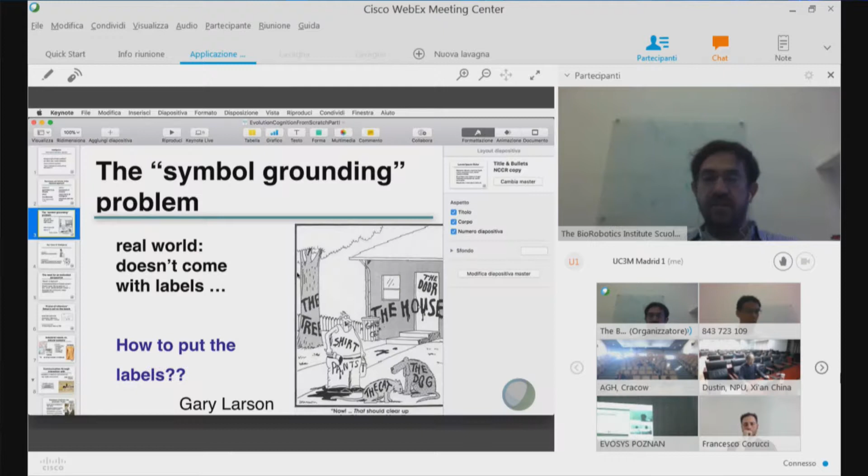So about the classical approach to AI, there are problems; the new one also has problems. I would say that if we accept the idea that this is the way to go, these problems are actually interesting research questions.

So how can we put to work this idea that the interaction with the environment is always mediated by a body? I was also discussing a typical problem of a classical approach, which is the frame of reference approach.

It's the famous example proposed by Herbert Simon about an ant walking on a beach. So the ant walking on a beach - you can imagine this beach in the picture where you have many different obstacles, small rocks, bigger rocks, and the ant seems to walk in a very complex way.

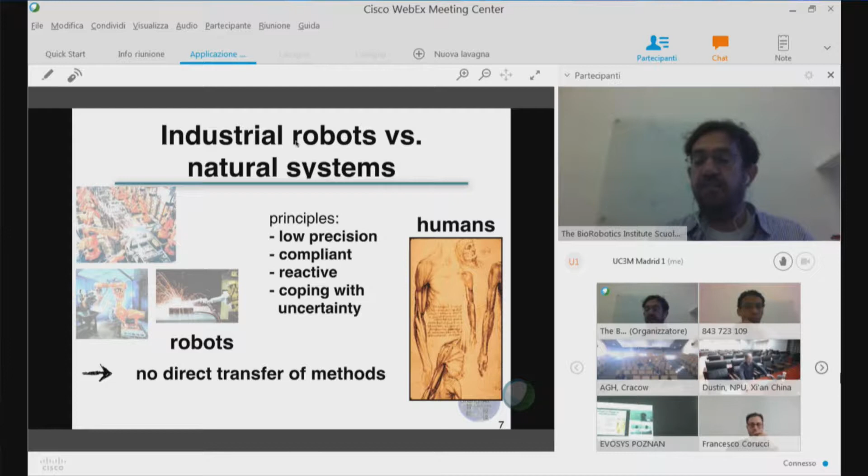So we have this situation. On the one hand, we have robots, which have very accurate, repeatable, precise movement. And on the other side, we have humans, who are low precision, compliant, reactive more than planned, and able to cope with uncertainty.

Simon's ant was actually studied in reality by Holk Cruse, looking at how ants work. And what has been discovered is that actually the walking of an ant comes from the emergent behavior of a very simple control of a single leg. And this behavior is actually mediated by the body.

How to model that? That's an interesting mathematical issue. In the next lecture, both me and the guest lecturer will show you how exotic those models could become.

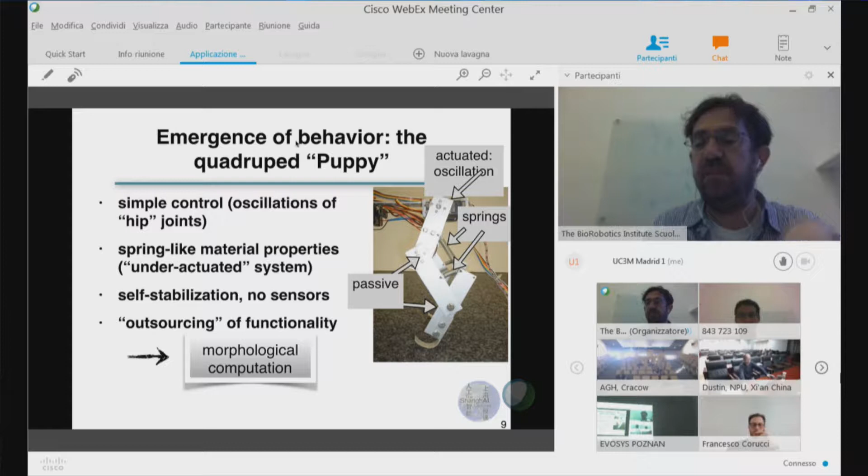This is a famous example by Fumiya Iida of morphological computation. And the nice thing is that this puppy, which was extremely simple, was able to run on a treadmill in a very natural way.

So we have a controller, but then a lot of behaviors are a direct consequence of a musculoskeletal system and of a task and the environment. So think of the ant walking on the beach and also the ant studied by Holk Cruse.

So there have been attempts, I don't have time, but if you are interested, we can go into this offline or in a specific lecture.

Essentially, this puppy is following some attractor in its own dynamics, which are the consequence of the body structure of a puppy. This is extremely interesting because you know where the problem is.

The problem is that if I want to build a demo, I build this puppy, or I build the biped passive walker, and I'm okay. If I want to exploit this principle in a robot doing some purposeful task, I need to develop, not from scratch, but from an early point, a mathematical modeling framework to do that.

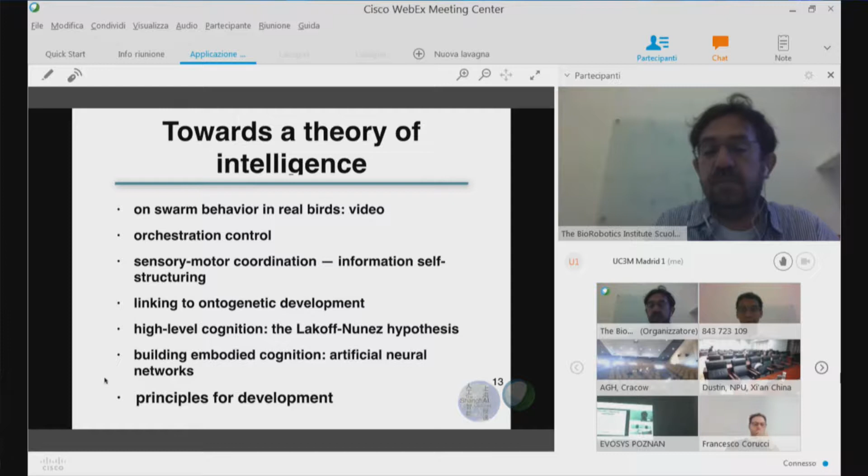Despite the fact that, as told, the principle seems very, very compelling.

Now, I don't know, I will skip this. Oh God. I will try to... I'm doing this experiment. I hope it will work.

I want to show you two things actually. One, but briefly, I'm not going to show you the whole movie.

One is the extreme complexity emerging from simple rules like keep a constant or almost constant distance from your neighbor, which is what we typically see in swarms, and was studied, proposed initially by Reynolds for computer graphics, to be able to simulate this kind of behavior.

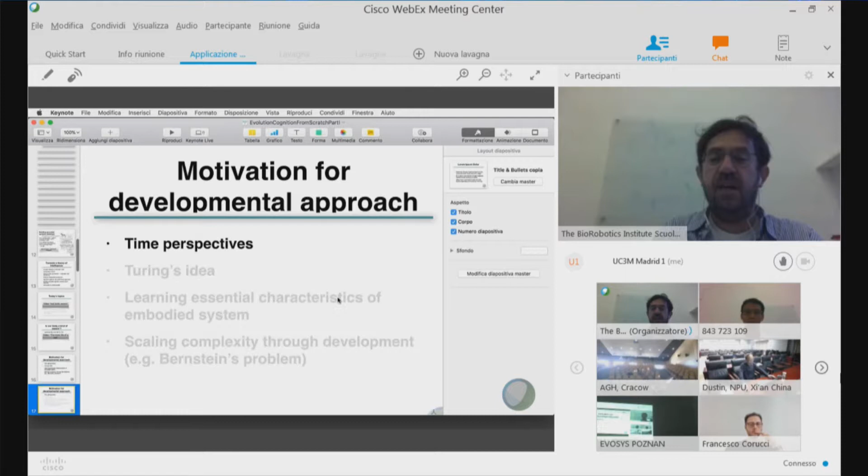Now I want just, since we are slightly late, I want to quote this important aspect that is, now it is less, but in the past it has been more neglected when studying intelligence. Because if we look, you know that at least at the beginning, the idea of AI was to replicate. So still, from time to time, you hear someone talking about human level intelligence, or even super intelligence putting at risk humankind.

Personally, I think we are quite far from those kinds of risks, but from a pure conceptual standpoint, we can see that human-like, real human level intelligence comes from a number of different processes, call them optimization processes or selection processes of behaviors at different levels.

Because we have the phylogenetic level, which is the evolution of a species, where something is set. Then we have the ontogenetic level, which is the development.

So when you think about grasping, for example, next lecture in a few minutes will be about grasping. In humans, this arm is able to perform some relatively sophisticated grasping task, but it took about 2 years to reach that level, when the arm was a small arm similar to this. The brain structure and the symbolic structures developed together.

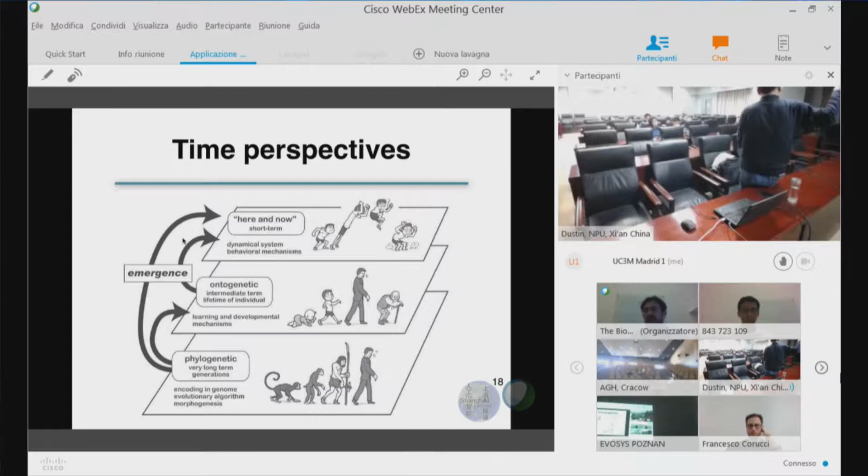So if you remember the last lecture from Josh Bongard, we have reason to think that development is necessary to make evolution quicker, so to speak.

And then we have what we are now probably able to implement, which is just one step of evolution of human level intelligence in humans, but also cat level intelligence in cats, or octopus level intelligence in octopus. So it's the short-term optimization of a behavior, which can be learning.

And what is now very successful, I hope we will have time to come back to this in a later lecture, is basically deep reinforcement learning.

So deep reinforcement learning is a very data hungry approach to what we may call the here and now. So it's the final optimization, and it relies on tagging.

So it's still not, but this is the reason why I'm not so worried by AI taking control of the world. I think AI is still very, very limited in that area.

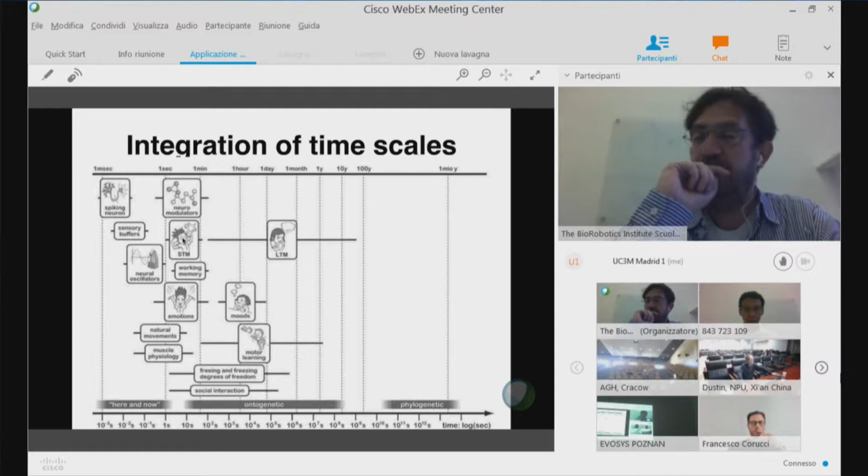Hello, everyone. I'm very glad to have the opportunity to talk to you today. Just to thank Fabio for the invitation. Fabio is here with us this week, and we are very happy to have him here.

So I'm going to talk about enhancing in-hand manipulation via mechanical intelligence. This is one of the main topics of my research group. I am Nicolas, a lecturer in the Dyson School of Design Engineering, Imperial College London, where I lead the REDS lab.

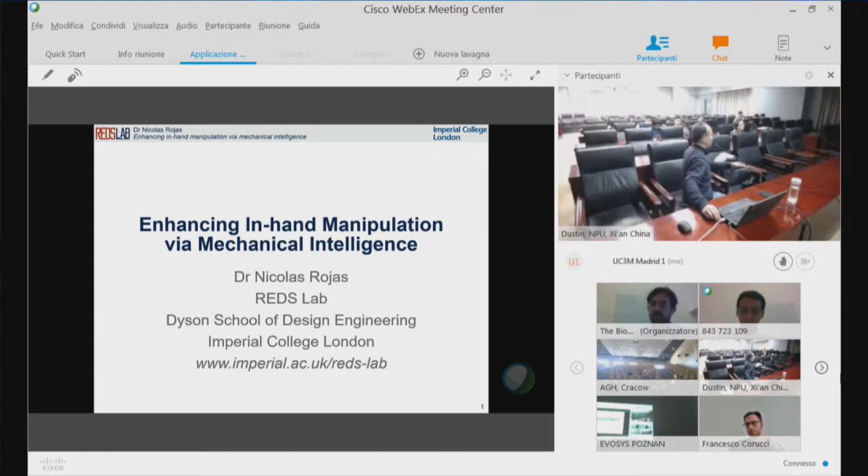Initially, I will talk about general manipulation and how we see manipulation in my research group, so you can have a better perspective of what we are developing. Later I will focus more on the aspects that we have started or explored in the last year, which will drive our research agenda for the coming ones.

Manipulation, for me, is basically the future of robotics. So far, robotics has focused mostly on mobility, and we have progressed a lot in that aspect. The coming revolution is manipulation, and I consider manipulation the technology that sets robotics apart from any other technology. It's a very broad word, and sometimes these broad words are difficult to define, but basically manipulation is the involvement of technology to...

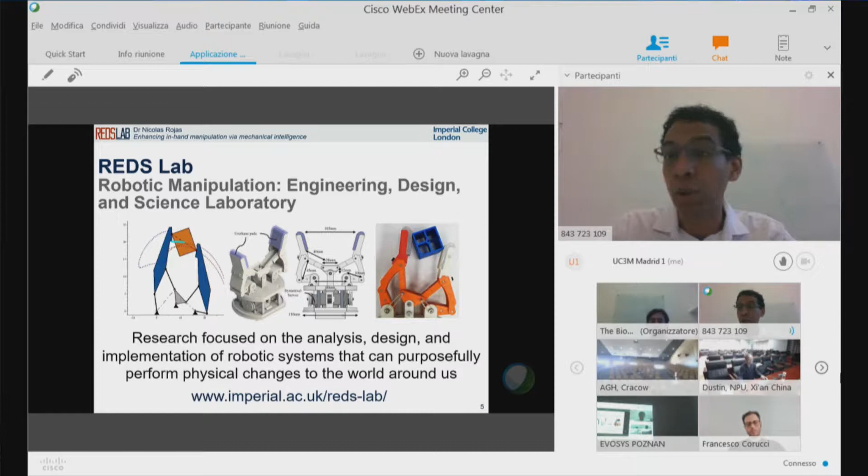In my research group, the REDS lab—Robotic Manipulation Engineering Design and Science Laboratory—we focus on the analysis, design, and implementation of robotic systems that can purposefully perform physical changes to the world around us. We have two broad research interests: robotic gross manipulation and robotic fine manipulation. We focus a lot on conceiving new types of manipulators and end effectors, new concepts and technologies, following both a theoretical and a practical approach.

We are interested in investigating what can be built from the laws of mathematics and nature, to obtain manipulators and end effectors from these mathematical models that can improve the state of the art. But one very important part of our research is the practical aspect—we build robots, we build things from scratch. We need to test things because in manipulation, from my perspective, you can have multiple simulations, but the real world is different, and we have to deal with that. We develop robot hardware that is robust to the uncertainties of not just the environment, but also the uncertainties from the robot itself, the sensors, the actuators, and so on. Our long-term goal is to create robots from scratch that surpass the manipulation capabilities of certain humans and other animals in their diversity and uncertainty.

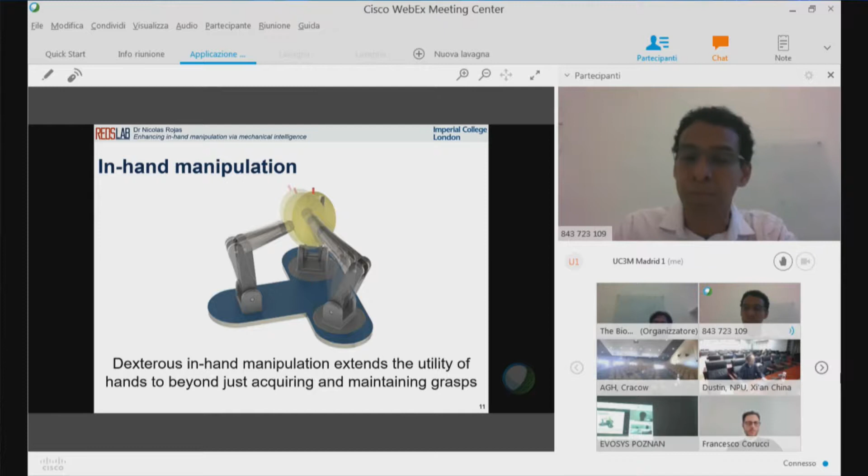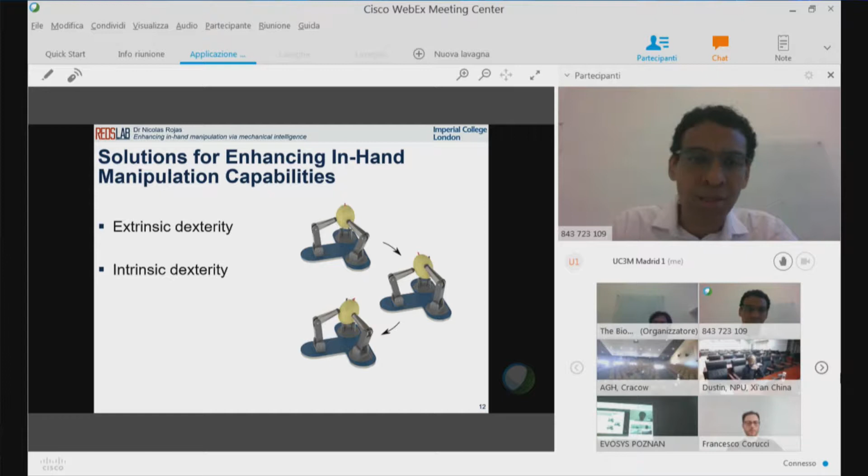The solutions for enhancing in-hand manipulation capabilities can be broadly classified as extrinsic dexterity and intrinsic dexterity. Extrinsic dexterity corresponds to approaches that use resources extrinsic to the hand, for example a table or gravity, in order to improve or facilitate the manipulation you want to perform. Examples include in-hand grasping and cage manipulation, because you use gravity for improving that.

Several researchers have made important advances in this area. One important aspect in extrinsic dexterity, and the approach we want to follow, is to make things reliable in open loop first—things that can control and manipulate the object in open loop. Our hypothesis is that if we develop the best open loop hardware that is very reliable, later when you close the loop with any technology, whether classical control or machine learning approaches, your results should be better.

In extrinsic dexterity, we have seen examples of multiple manipulations, like the flip and pitch-and-flip task of a coin, or the reorientation of cylinders, and so on. Here you see that you are using features external to the hand in order to accomplish these activities.

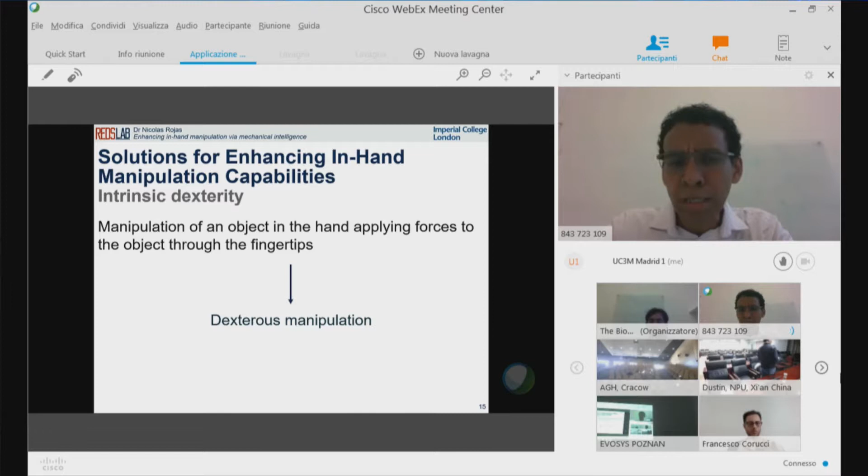In intrinsic dexterity, the manipulation of an object is achieved by applying forces to the object through the fingertips. We grasp the object and rely on the forces we can exert from the fingers in order to change the orientation of the object. This is the typical definition of what we call dexterous manipulation. In this area, there have been three main approaches to enhance the in-hand manipulation capabilities of our hands.

One approach is, of course, the use of high fidelity contact sensors to close the loop and try to manipulate things easier. Another very successful approach has been the use of active or sliding surfaces on the fingertips. And another approach is that you grasp the object, explore the workspace of the object—what is called the dexterous workspace—and then propose planning algorithms.

I want to focus a bit on the second aspect, active and sliding fingertips, because it has been successful. Basically it corresponds to adding some kind of actuator—a slider actuator or a rotator actuator—in your fingertips, and in that way you can control the object.

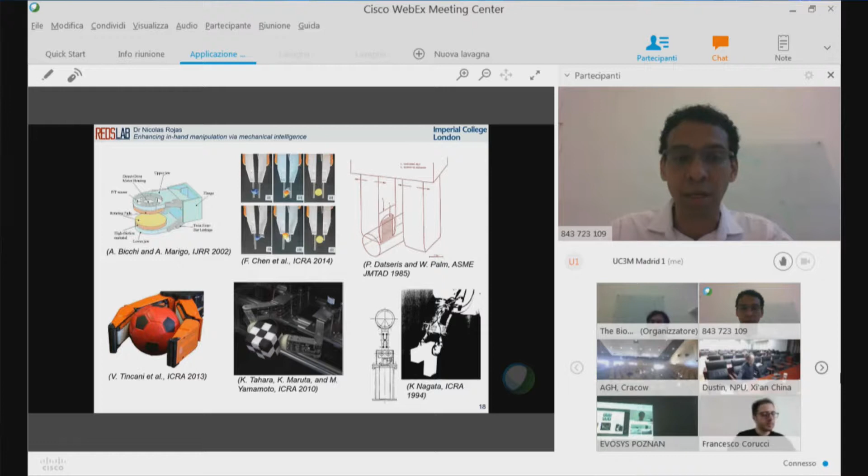Of course the results are good, but we are more interested in understanding better how we can perform these activities directly from the forces of the fingertips. One reason is that one of the problems with active surfaces is that you end up dealing with the problem of controlling the cooperation between these new actuators. So you have the actuators of your hand plus the actuators of the fingertips, and the coordination of these things in order to perform the activity is not necessarily straightforward.

Our approach is a new intrinsic dexterity approach based on the use of flexible and adaptive mechanical components that generate predictable behaviors of the hand-object system. This is our main difference and how we depart from previous approaches. Basically, we see the object and the hand as a whole system, and from there we evaluate how that system can behave and what we can do in order to obtain different motions that could be useful for the object. The three aspects we have focused on for pursuing this approach are contact modeling, manipulation analysis, and design of robot hands.

I'm going to briefly talk about them and what we have done so far. I want to start with contact modeling. The type of contact interactions which can occur between a grasped object and a fingertip are usually classified into 9 categories. The first category is, of course, no contact, so the object has 6 degrees of freedom.

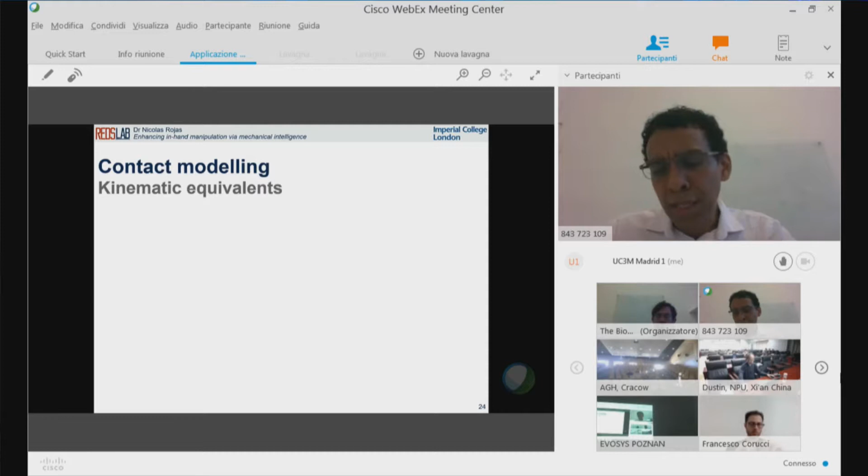So with this, I would like to talk about the kinematic equivalents of these contact models.

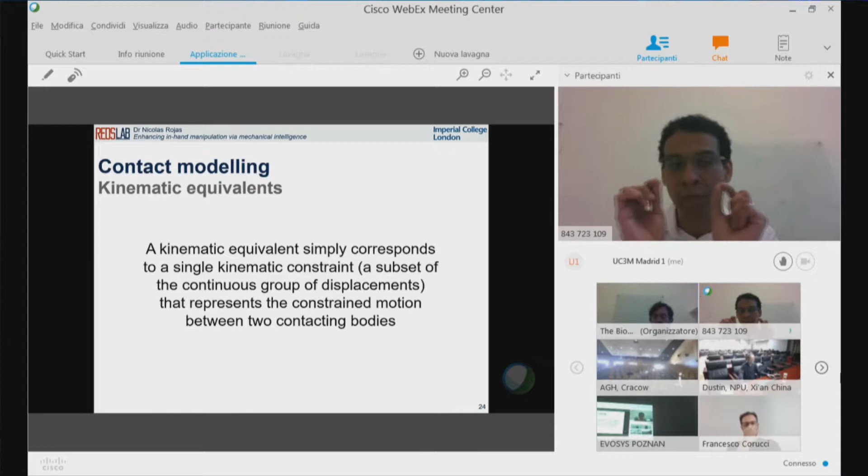A kinematic equivalent is simply a single kinematic constraint that represents the constrained motion between two contacted bodies, between the fingertip and the object. It's a single kinematic constraint that describes this interaction.

We have three standard contact models: point contact without friction, point contact with friction, and soft finger. The kinematic equivalent of point contact without friction is a spherical plus a planar joint. For point contact with friction, it's a spherical joint. And for the soft finger, it's a universal joint. Here we show the different kinematic equivalents of these standard contact models.

A very interesting aspect is that this relation between the contact models and the kinematic equivalents is actually the opposite historically. How robotic manipulation developed the concept of contact models was: let's model the connection between the fingertip and the object as a kinematic pair. That was the origin of the contact models, and from that assumption came the development of the contact models, introduced by Salisbury in his PhD thesis and later complemented by others.

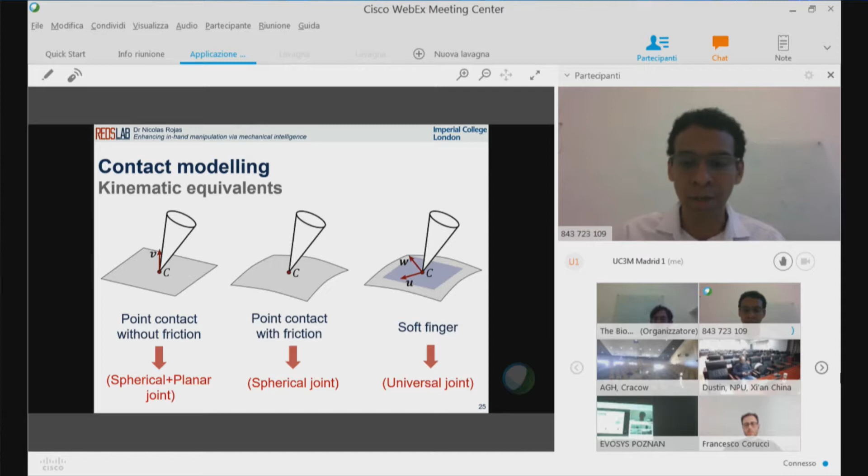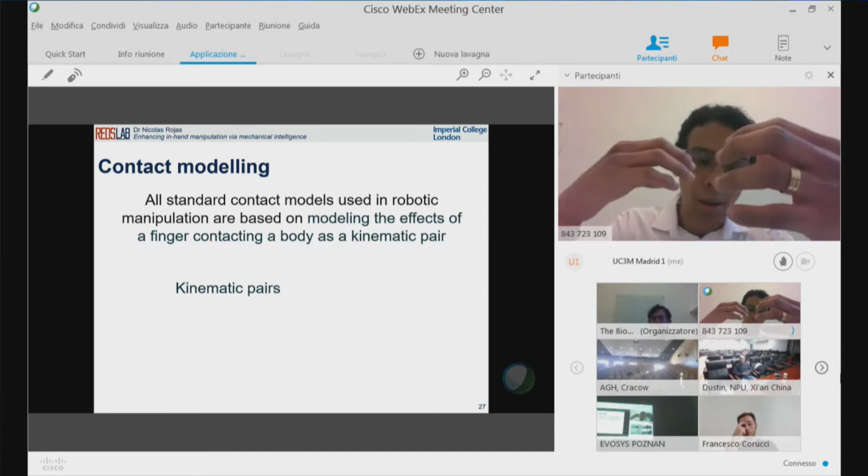So, as I was saying, all standard contact models in robotic manipulation are based on modeling the effect of a fingertip contacting a body as a kinematic pair. When we realized that, we started to think: why not have a more general action for this interaction between the object and the fingertip, allowing a richer definition of contact models?

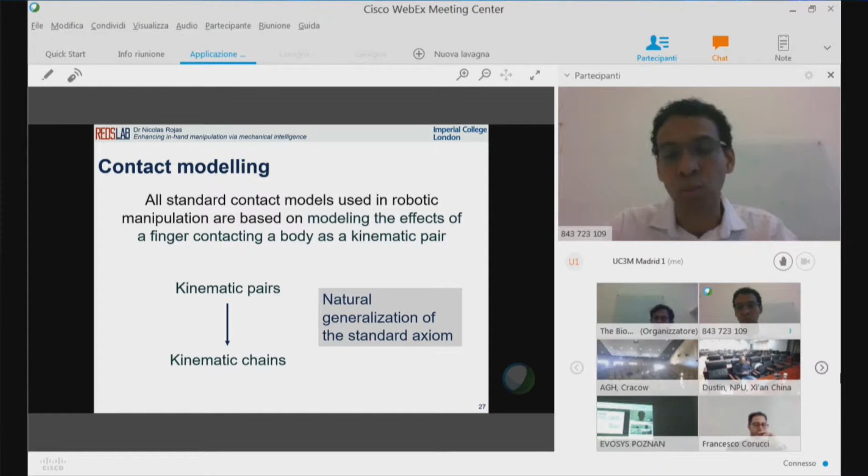So the natural generalization of using kinematic pairs is to use kinematic chains. We started to explore how we can model the interaction between the fingertip and the object using kinematic chains, and we proposed this kinematic chain-based contact model.

We model friction using what we call resistant passive joints, located in the fingertip. Usually passive joints are modeled to move as soon as any torque is exerted on them, but we model friction by saying that in the fingertip, these three joints are resistant passive joints. This means they can resist motion up to some threshold, and when that threshold is passed, the contact breaks because friction is overcome. We chose to call these resistant passive joints instead of friction passive joints, to avoid implying specifics about the geometry or nature of the phenomenon.

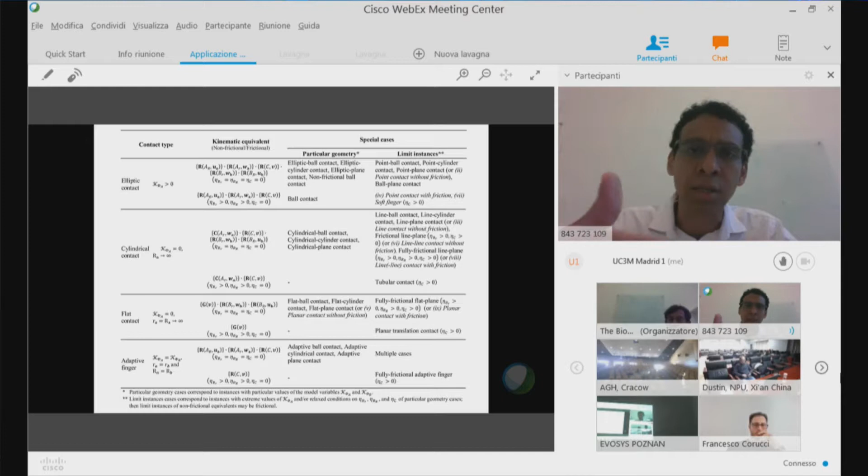Basically, resistant passive joints are those that can resist motion up to some torque. Thanks to this generalization, we have proposed a general classification of contact types, classifying four big contact types, with some special cases. Importantly, all standard categories used in robotic manipulation, the Salisbury taxonomy, including line-line contact with friction introduced later by Hunt in the mid-90s, are obtained as special cases of this generalization.

Moreover, we have proposed new contact models from this generalization that are useful. I won't go into detail here, but we have shown how the wrong assumption of a contact model can lead to wrong results in your analysis. For that reason, it's important to have a larger classification of contact in order to better mimic reality.

So with this, I'm going to talk about manipulation analysis. This has been our first approach, our first goal to enhance manipulation. In manipulation analysis, we have focused on what we call precision manipulation.

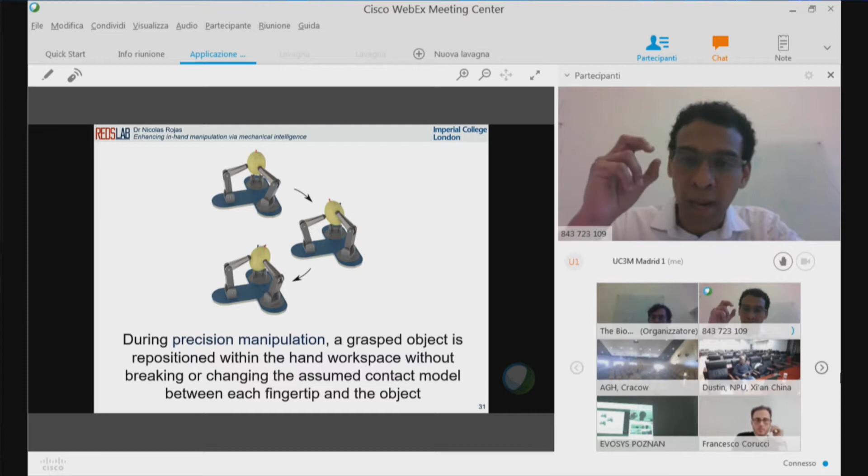We define precision manipulation as when a grasped object is repositioned within the hand workspace without breaking or changing the assumed contact model. This is important because any time you analyze manipulation, you are assuming some kind of contact. In precision manipulation, it happens when we can manipulate the object without breaking or changing the assumed contact. Examples include writing, opening a door with a key, using scissors. There are multiple applications of this kind of manipulation.

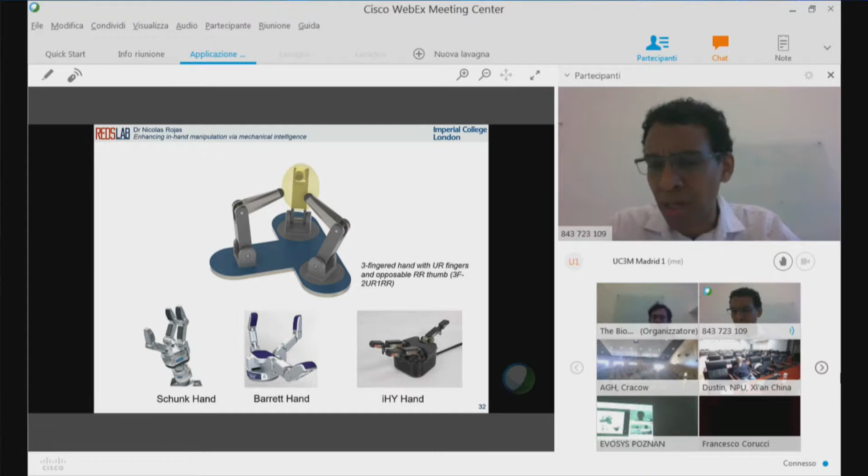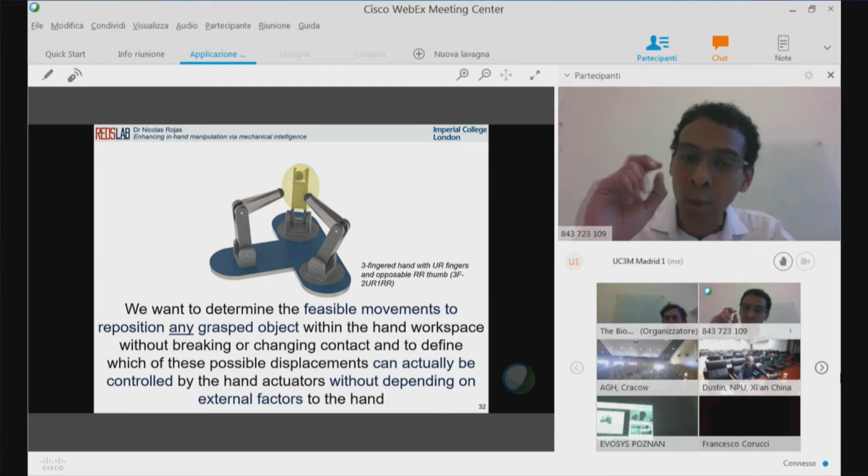Imagine we have this three-finger hand. This is a very popular layout, the same layout we have in several commercial robot hands. Our goal with this analysis is to determine the feasible movements to reposition any grasped object within the hand workspace without breaking or changing contact, of course. Most importantly, we want to define which of these possible displacements can actually be controlled by the hand actuators without depending on external factors to the hand, for example gravity or other things. So we want to understand really what is the motion of the object that we can control with the hand actuators.

We call this precision manipulation analysis, and we have developed this during the last several years. One of the important things of precision manipulation analysis is that in general it's impossible to do with the standard techniques for grasping analysis that we have. It's very difficult, in general not possible. For that reason, we started to explore how we can characterize the motion of the object first, and later how we can determine what actually are the displacements that we can control of this object with the actuators that we have.

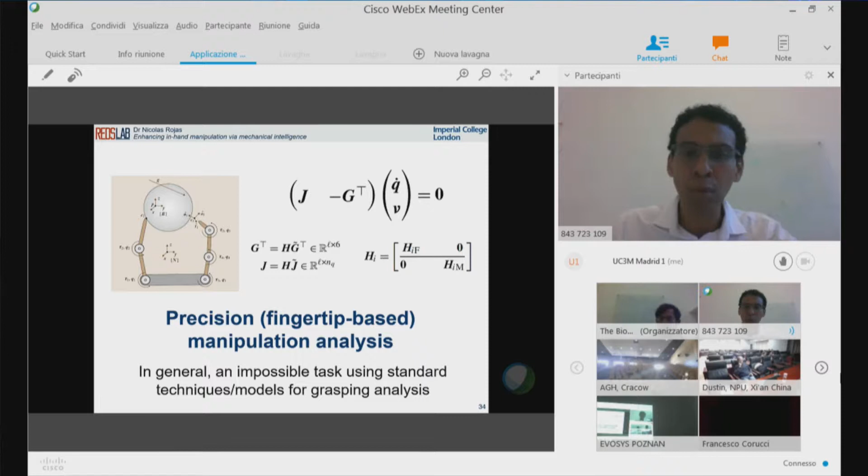Our method is based on the kinematic analysis of the closed kinematic chains associated to the hand-object system. Imagine we have this two-finger hand with opposed revolute fingers, so two opposed thumbs basically, a very simple hand. The first step is we model the contact between the fingertips and the object using the kinematic equivalence we introduced previously with the contact modeling. For example, we can use point contact without friction, or point contact with friction, or tubular contact, or whatever you consider, depending also on the design of your fingertips.

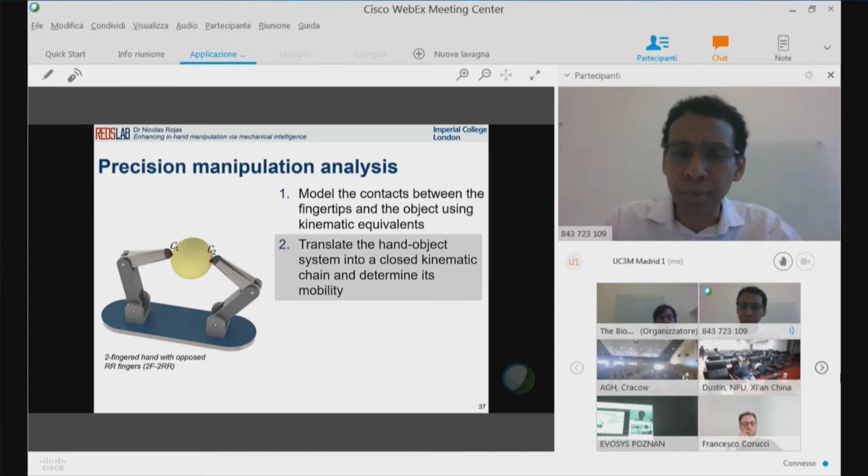The second step is we translate the hand-object system into a closed kinematic chain, and we determine its mobility. The third, for example in the case of this two-finger, two-revolute-fingers hand, we model the contacts with friction. So the associated hand-object system corresponds to a closed kinematic chain that is a 6-bar linkage with two RRS serial limbs, revolute, revolute, and spherical limbs. The resulting mobility in this case is 4.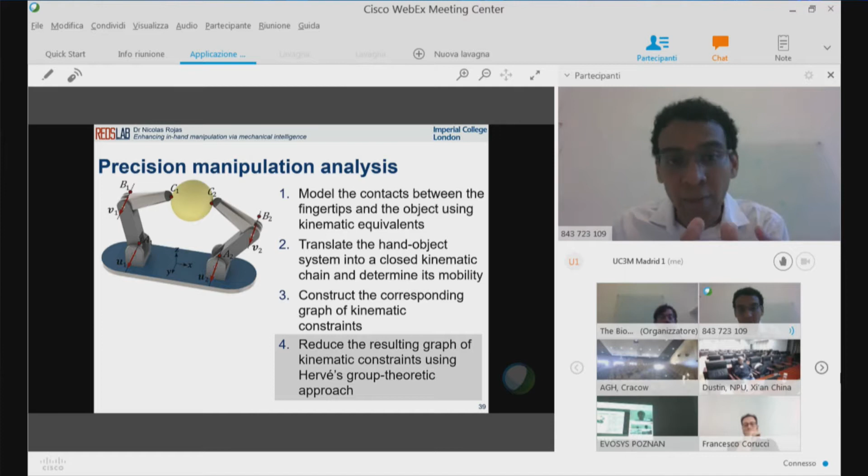Once we have this model, we construct the corresponding graph of kinematic constraints. We see the example of this construction of the graph of kinematic constraints, describing how the constraint works between the object and the link, and between this link and that link. We describe that characterization of the kinematic constraints, and we reduce this graph using Hervé's group theoretic approach to obtain what are the feasible displacements that we can control of the object. So in this simple and basic example, the characterization of the displacement of this object corresponds to a composition of planar motions and a rotation around the contact points.

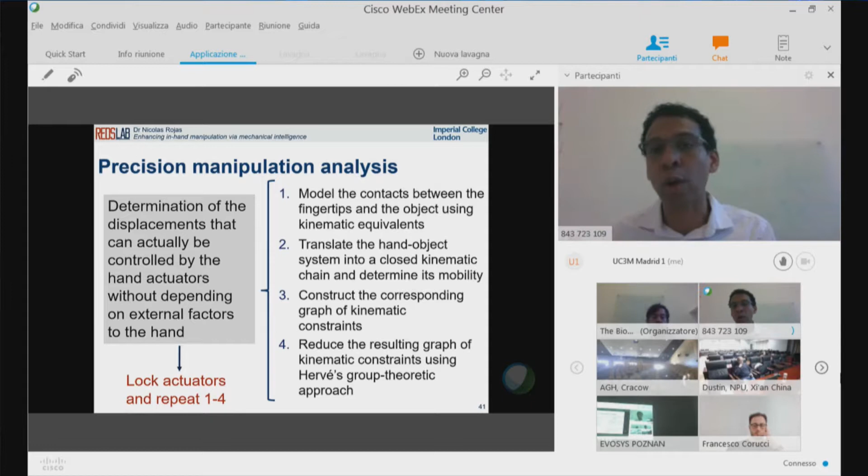That is the characterization of the motion that is possible with this hand for any object. After these four steps, we obtain a definition of the general displacement characteristics of any grasped object relative to the palm. Finally, what we want to do is determine which of these displacements can actually be controlled by the hand actuators. To this end, we repeat the analysis, but we lock the actuators that we have. In this case, on the hand, we have 4 actuators in general, one for each joint that corresponds to the joint of the fingers. If we run this analysis with these locked actuators, we obtain that for the case of this hand, the revolutions are along the axis defined by the contact points.

So this means that basically there's a rotation along this axis defined by the contact points that cannot be controlled by the hand actuators and depends on external factors to the hand. This is actually very intuitive, we can see this easily. The issue here is that with this method, we can compute this for different types of layouts, even for any type of layout, and most importantly, we can understand what are the motions that we cannot control.

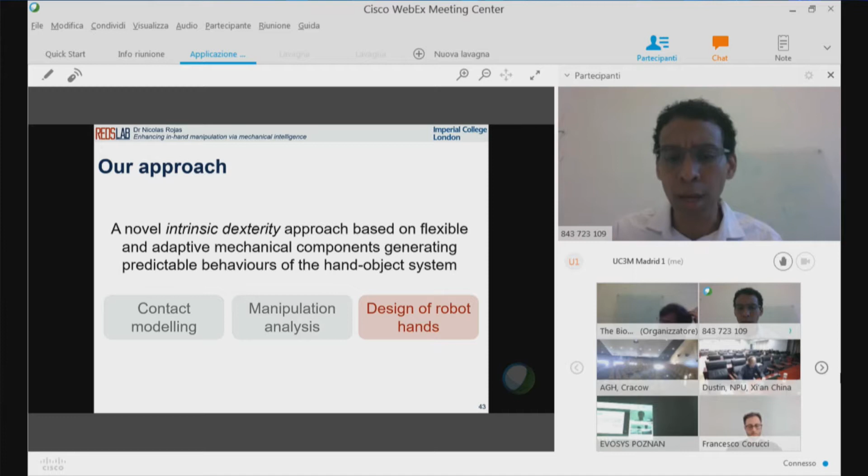This has implications in design, of course, and also for the control of the hand. Finally, I want to finish describing some of the design of robot hands to improve the in-hand manipulation capability that we have right now, following these ideas that we have introduced. I'm going to present three types of hands: the spherical hands, the GR2 gripper, and the coalesced topology.

So the spherical hands are a series of underactuated 3-finger hand topologies that have 2 curved fingers and a normal thumb. The main characteristic of this hand is that when you grasp an object, any object has always an instantaneous center of rotation that is fixed and is always at some point relative to the palm. So basically, the motion of the object is always spherical.

We think that this can be useful for facilitating the planning of the motion of the object, so for that reason we explored that. So here we have a 3-finger hand, 2 of the fingers are curved, and we have a thumb. In the first iteration, we have these two curved fingers and an additional thumb. Using the technique that we introduced, we prove that the spherical motion of the object, regardless of the characteristics of the object, always the gross motion of the object is spherical. Of course, the specific particularities of that motion depend on the characteristics of the hand and the object, but in general, the motion will always be spherical.

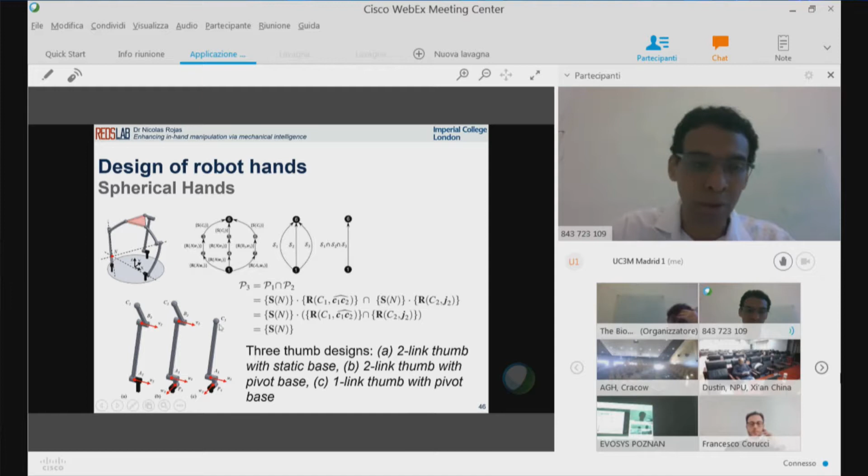So, for instance, in the case of the two-link, this corresponds to a revolute joint with a pivot joint. The extra pivot joint is controlled passively, so we added elastic elements there in order to have control of that passive joint without actually controlling it directly.

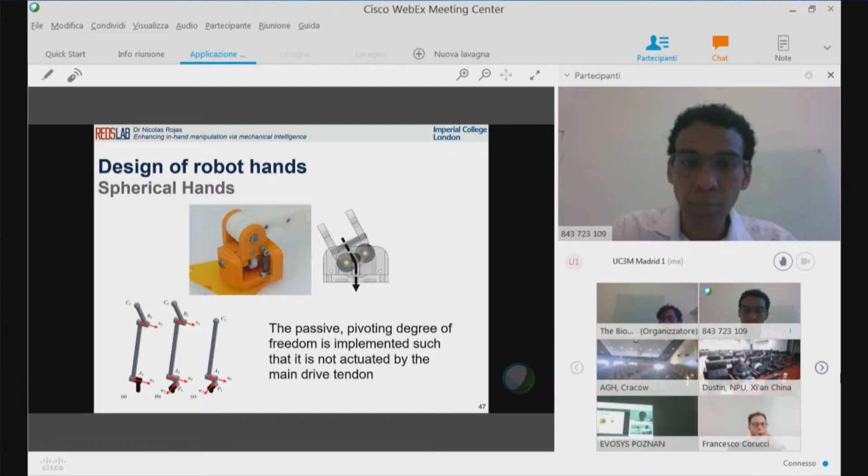We also explored this example of the curved fingers that we propose, compared with normal fingers. We propose multiple fingertip designs to improve the assumption, because in designing this hand we were always assuming that the contact between the hand and the object was a point contact with friction. As we know, the kinematic equivalent of point contact with friction is a spherical joint, so what we try is to mimic as best as possible the behavior of the spherical joint.

To that end, we developed multiple fingertips with a magnetic sphere, and we cast the urethane corresponding to the fingertip in order to have better performance. So we tested this hand with different objects and compared the behavior of the hand, also showing that it keeps the grasping operation, so we are not removing the grasping operation from the hand.

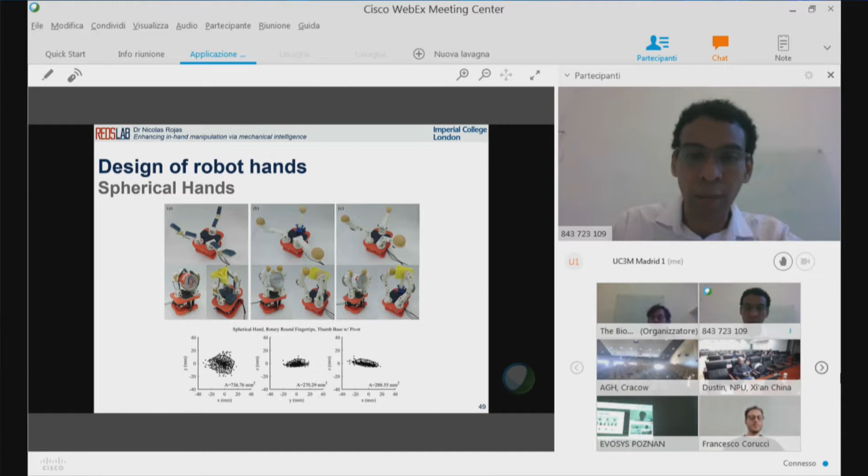Okay, I'm going to check my time here. So here we see an example, the video that we prepared for that.

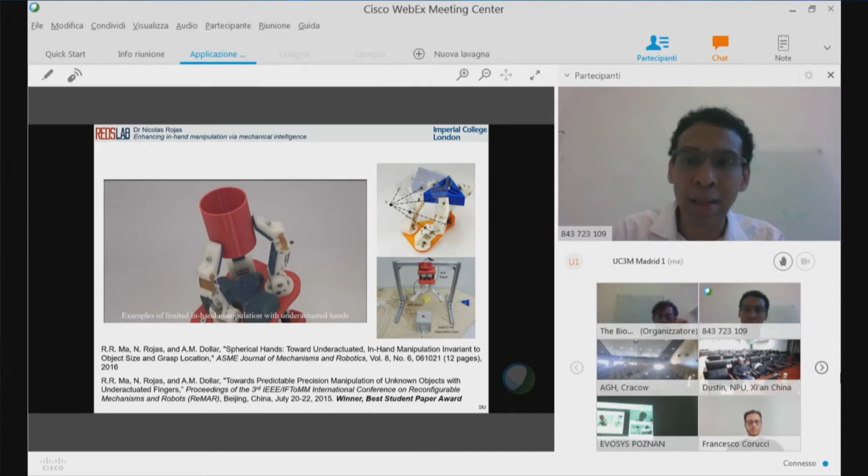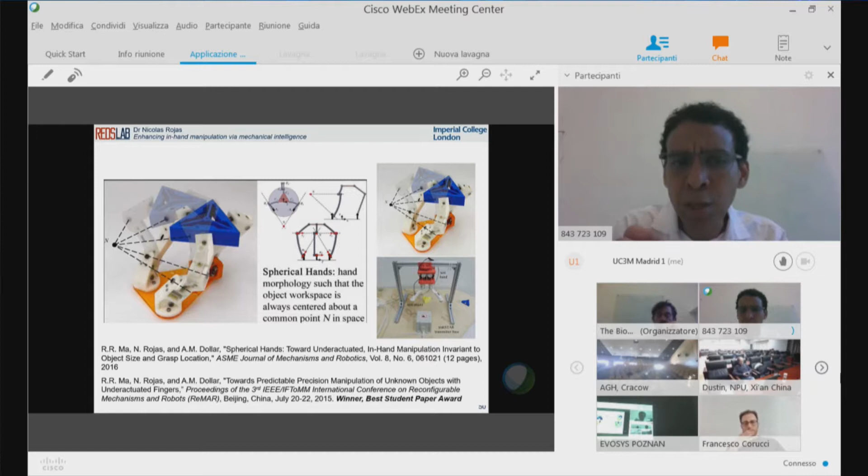Here we see the limited in-hand manipulation capabilities of underactuated hands. They are very good to grasp, but the motions are very limited. It's very important to highlight that the workspace for precision manipulation is indeed very small, and that's because by assumption we cannot break contact. This kind of motion is what I call precision manipulation, useful for precise tasks, so you cannot expect to have a very large workspace. That said, the workspace we have with classical standard hands is not very good, so for that reason we started to explore how we can improve that.

So here we first run several experiments to prove the spherical motion of the hand. We do that by attaching markers to the object in order to show the workspace of the hand. Here we see the example of the hand with the standard fingers.

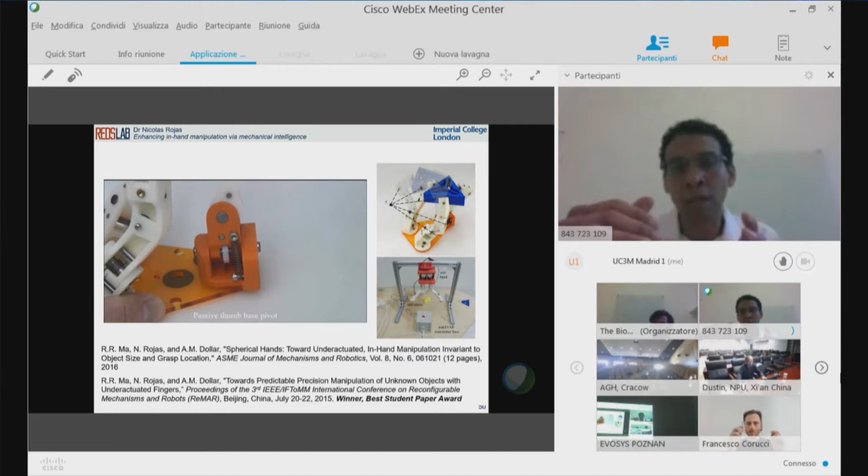We did that with different objects. Here we see how the behavior is in the case of the spherical fingers, the curved fingers, and in this case there is no pivot at the thumb, so the workspace is limited. The final solution was to add a pivot with an elastic element, so that when forces are exerted on the object, the thumb can respond to those forces by bending towards the size required, giving a larger workspace.

Of course, theory and reality are different things, because when you manipulate an object, you don't have these fixed constraints. But even so, we were able to obtain a better workspace.

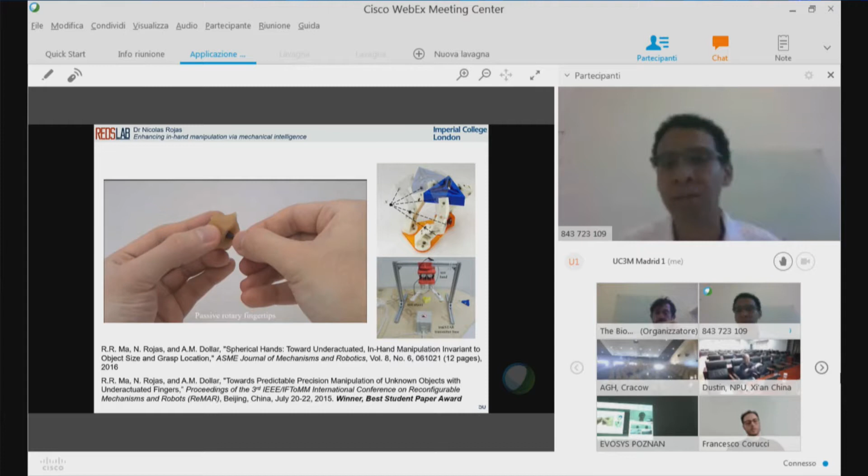Here we see the fingertips and how they were designed. We see the magnets, and this icosahedron shape was proposed so that it would cage the object. We also propose other types of fingertips.

I'm going to advance, we're almost done with this video. Here's an example: if you remember the first video of the underactuated hand, this one is small, but that one was even smaller. Since this is very small, any change here has a big impact in percentage, so that's an important aspect.

The second hand I want to discuss today is the GR2 gripper. The GR2 gripper is an underactuated hand for open-loop in-hand planar manipulation. It's called the GR2 gripper because it means the grasp reposition reorient gripper.

It corresponds to a two-finger gripper topology that enables and enhances a predefined in-hand manipulation primitive. This primitive is the reorientation of the object, basically the planar reorientation, and this enhancement is achieved or possible for any kind of object.

Why did we want this? Because single degree of freedom two-finger robot grippers are the most common grippers in industry and research settings. This is because they are mechanically simple, reliable, low cost, and have very good force capabilities. However, they can be very limited outside of pick and place operations.

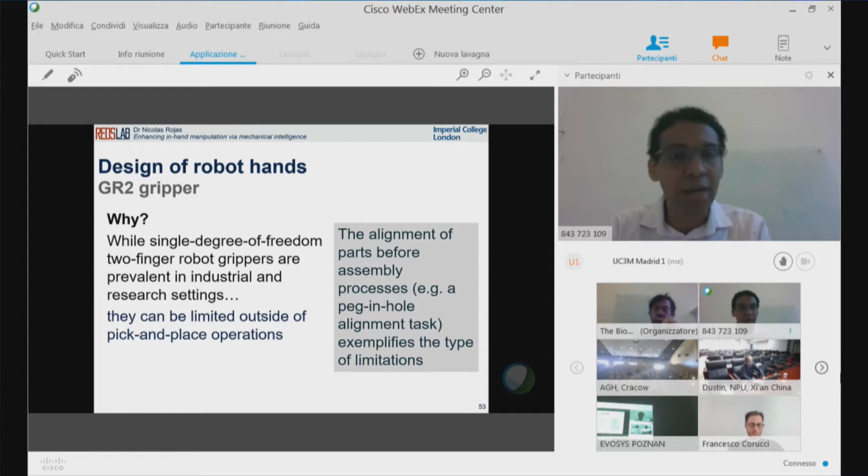A typical example of this limitation is the alignment of parts before assembly processes, for example the peg-in-hole alignment task. That's the type of limitation you have with these grippers, and you have to rely on the dexterity of your arm rather than the dexterity of your hand to perform this activity.

This is a generic instance of a traditional two-finger robot gripper with 4-bar linkage fingers. This is the most popular type of robot gripper. Here are some examples, images I took from Google. The most important thing is that this mechanism has historically been employed solely for grasping operations, without considering any feasible capacity for dexterity. So just to grasp, nothing else.

For that reason, we started to discuss how we could maintain the simplicity of this gripper just for grasping, but add some kind of dexterity in order to do something beyond the grasping operation. For that reason, we propose what is called the GR2 gripper.

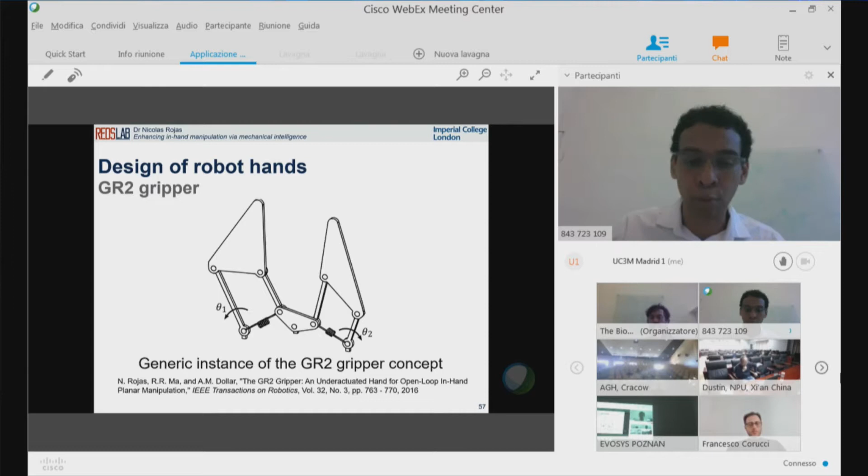In the GR2 gripper, we also have this pivot in the palm with elastic elements, and a reconfigurable palm that allows us to improve the workspace. One difference is that previously proposed designs independently incorporate elastic elements in each finger. In the GR2 gripper, these elastic elements are coupled between the fingers in order to change the behavior of the palm.

I'm checking the time because I have to go. So as I was mentioning, I'm going to go through this a bit quicker.

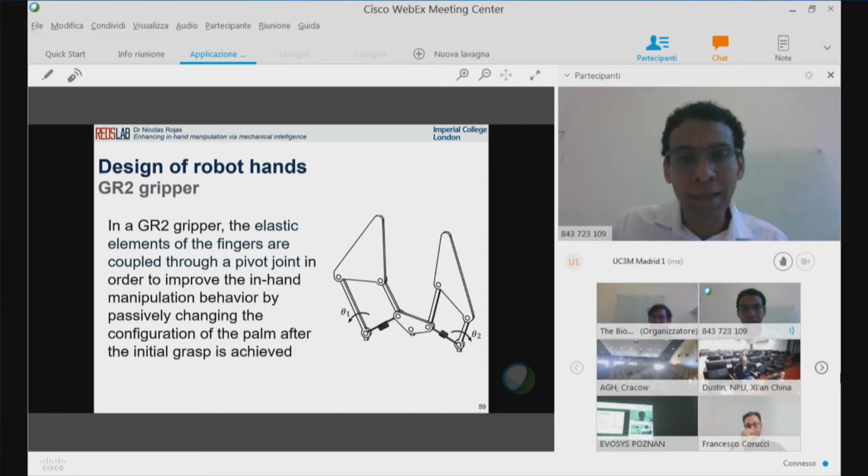So when we have dextrous manipulation, how we propose the dextrous manipulation in this case is we propose a hybrid control approach where we have a pushing finger and an opposing finger. The pushing finger is controlled using position control, and the opposing finger is controlled using torque control.

Basically, during these in-hand manipulation tasks, the palm behaves as a reconfigurable linkage. We have some examples of this in the traditional gripper, and we showed that the traditional gripper can have some kind of dexterous manipulation. So basically we're having a pushing finger and an opposing finger, just that.

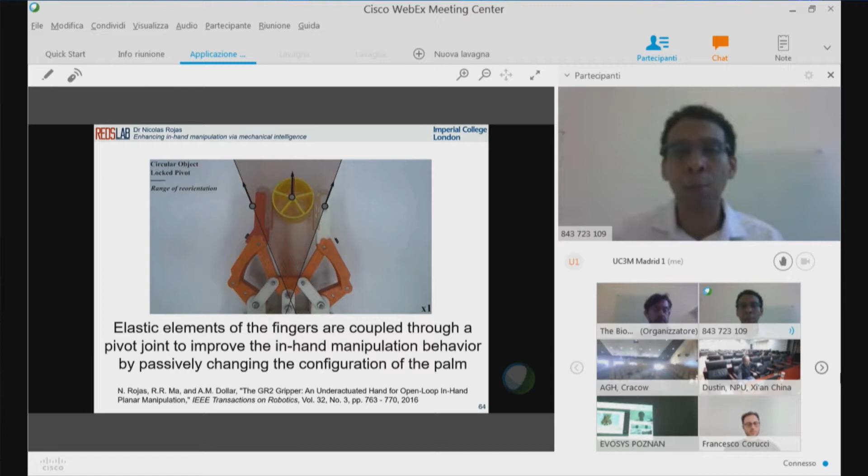But here we show that by adding these elastic elements, we can improve that behavior. This is basically the behavior of the GR2 gripper. Here we have the third example, for instance, with this circle, where we show the behavior of the traditional hand that has been classically used just for grasping operations, and here we see the behavior of the GR2 gripper. All of this is open loop control, just the result of the improvement of the mechanical aspect of the hand.

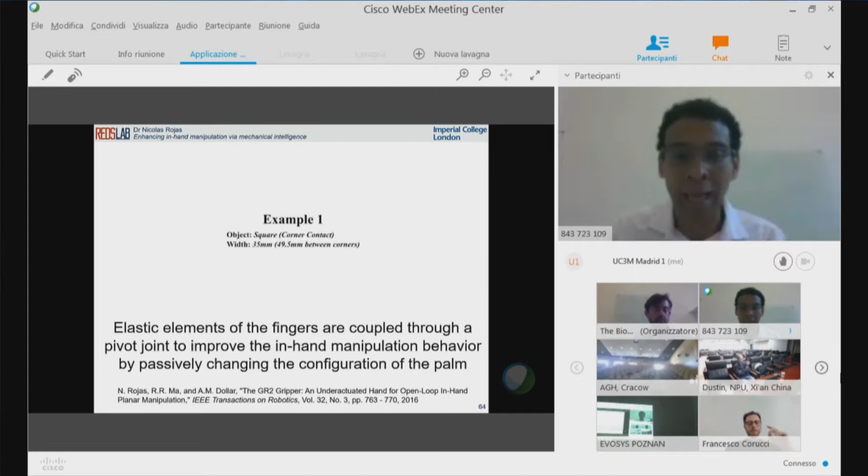Okay, so we have recently used this hand for model-free in-hand manipulation, and this is one of the important aspects of this kind of research, because as we know, we can obtain a better range of orientation with the GR2 gripper using a very simple low-level control scheme, that is pushing and opposing, pushing in positional control and opposing with torque control.

We have developed, along with some collaborators, the control of this behavior using tactile fingers, tactile sensors.

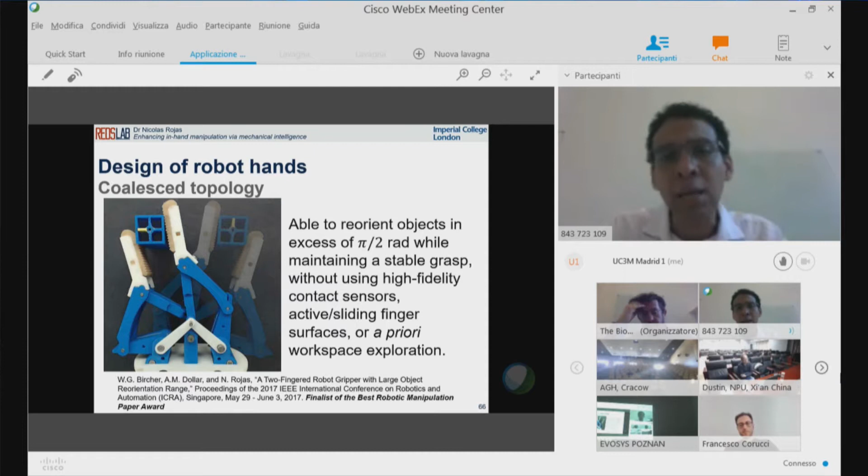Finally, I would like to talk about the coalesced topology. The coalesced topology is a result of an optimization of the GR2 gripper. So we started to explore how we can improve this range of orientation of the GR2 gripper, and finally we obtained this new topology.

This new topology is basically a result of a cascade optimization approach, where we were able to show that if we eliminate the palm, in this case, and we have a single joint there, we obtain a new topology, because in terms of the topology, the resulting hand is different. We can get up to 90 degrees of reorientation without any kind of control. We are just using open loop control. So basically that.

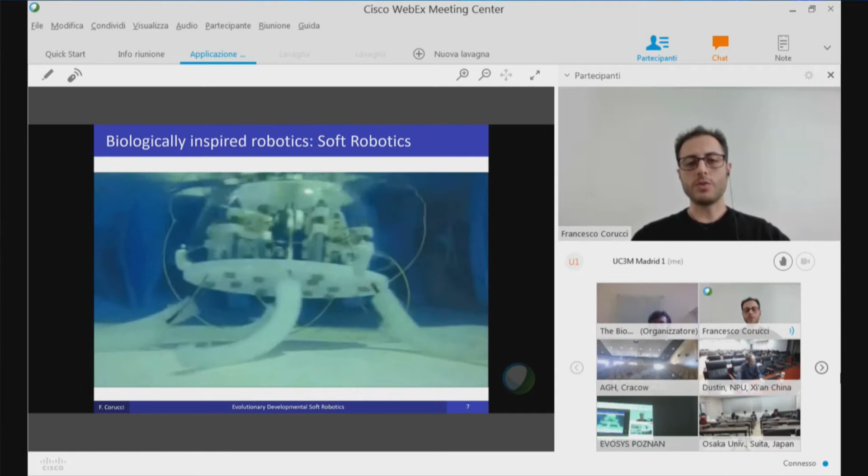Soft robotics is one example of that, and what researchers stole, so to speak, from nature in this case is the idea that it is beneficial to have some kind of deformability and soft tissues within both biological and artificial bodies.

But if we analyze biorobotics from a critical perspective, we can find pros and cons. Among the pros: it usually generates new technologies and new design principles, and sometimes new knowledge related to the biological model and insights into the intelligence of particular species. But it also requires a lot of human knowledge and careful engineering, usually focuses on very specific organisms or behaviors, and it's not clear whether it helps us generalize to arbitrary tasks and environments or realize general forms of artificial intelligence.

So maybe we need something more. If we take a step back and look at all these examples we've seen before, we can ask: what do all these things have in common? What they have in common is that they are the result of an evolutionary process.

This entails a paradigm shift in bioinspiration. Instead of replicating solutions found by nature, which is what we usually do in robotics, why not imitate nature's approach to design instead? That would be imitating evolution—going from replicating natural products to replicating the processes that gave rise to them. This, to me, is the ultimate form of bioinspiration.

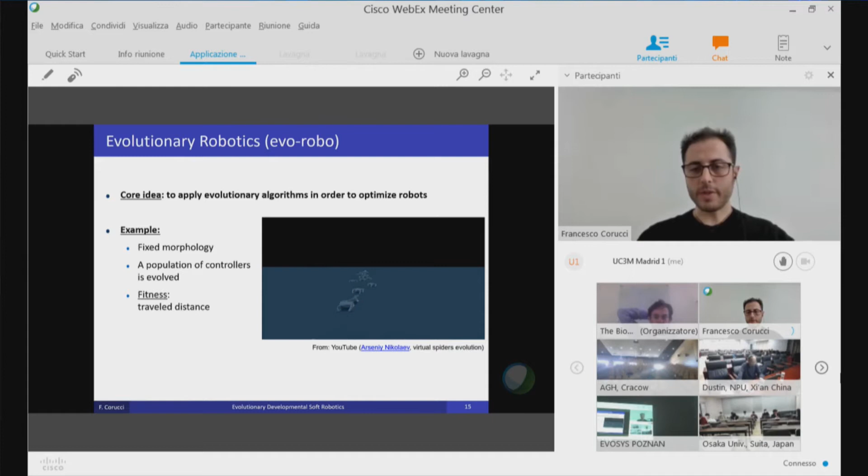So there are some implications to this approach. The first one I'd like to present is that it is in fact a design automation technique. What you input into the system is a problem formulation in the form of an encoding and a task environment. You input the desired outcome in the form of a fitness function, and what you end up with is a complete optimized robotic system ready to be deployed. This is easier in virtual environments, but with advances in fabrication techniques, we can envision this kind of design-fabrication pipeline also in the real world at some point.

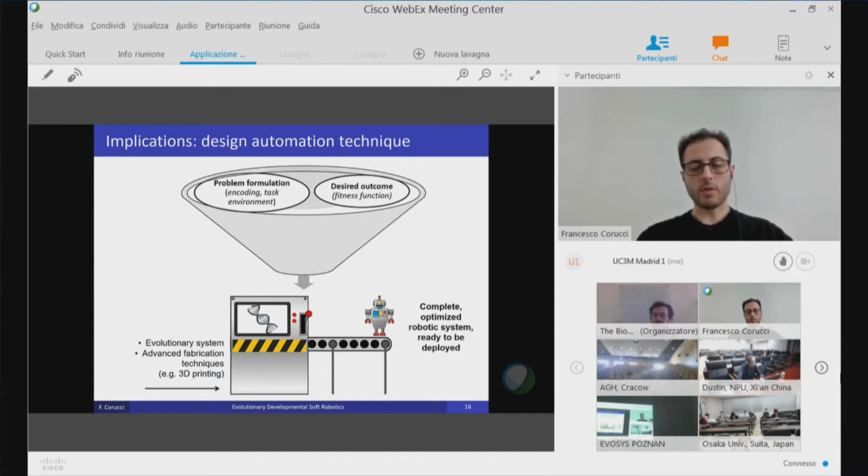Another implication relevant to the topics discussed in the Shanghai lectures is the idea of coevolution. In evolutionary robotics, evolutionary algorithms are usually coupled with powerful encodings, which allow representing all the complex characteristics of a robot, and thus to co-evolve and co-optimize them. For example, you can co-evolve morphology, controller, sensory system, basically everything you can possibly think of. This is particularly important in light of the concepts in embodied cognition, which tell us that intelligent and adaptive behavior starts within the body and its dynamic interplay with the brain and the environment. That would be the concept of embodiment. Also, a suitable morphology can greatly simplify control by performing implicit or explicit morphological computation. So the idea of co-optimizing all aspects of the robot, including the body, in an environment is particularly crucial if we want this kind of emergent simplification phenomenon.

But why deal with soft robots in particular? Well, because there is evidence that a soft body can facilitate the emergence of this kind of phenomenon, as it provides a better means of interaction between the brain and the environment, in the form, for example, of richer proprioceptive and exteroceptive stimulation, and also greater computational power.

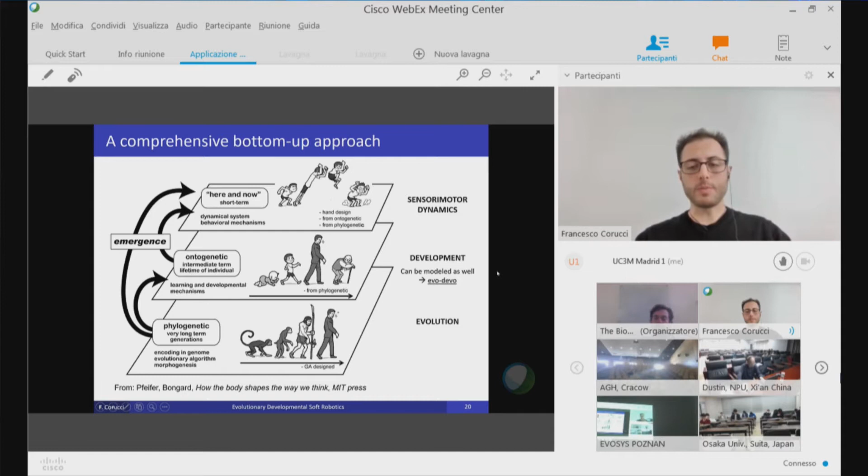All right, so we're going to deal with some case studies in this evo-devo field, evolutionary development of soft robotics. First, we're going to see a very engineering application of this kind of technique, using evolutionary algorithms to solve complex optimization problems. Later, we're going to present an example of using these techniques to explore the design space of a robot, to study specific properties of animals, and also to perform broader investigations, such as studying the free-form evolution of soft locomotion, and the evolution of development and morphological computation.

As for solving complex optimization problems with evolutionary algorithms, some time ago we happened to work on a project related to this PoseiDRONE robot. This is a soft octopus-inspired underwater drone, and we had a dynamics model of its locomotion. We wanted to use this model to improve the robot, and particularly to identify faster gaits for the robot. The problem was that the model struggled to describe the behavior of the robot, due to the many unknown model parameters.

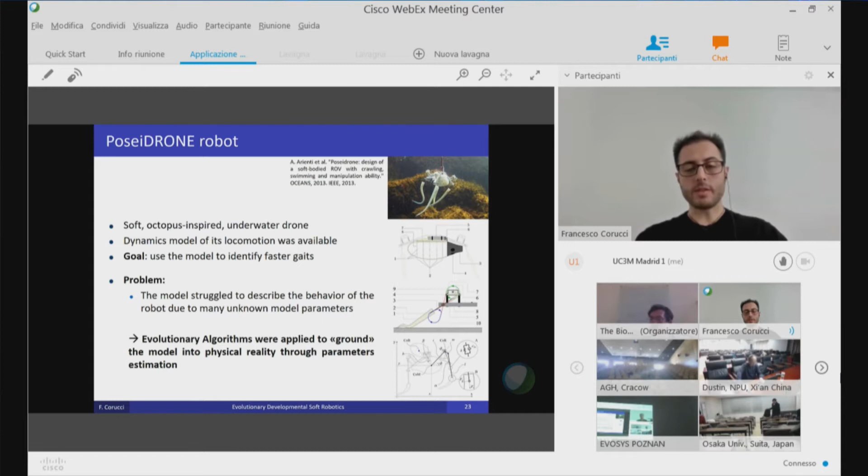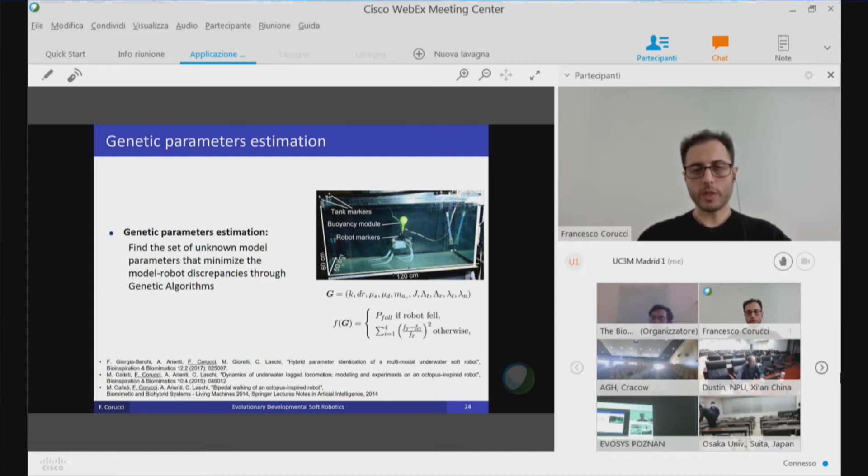So what we did was try to apply evolutionary algorithms in order to ground this model into the physical reality through a parameters estimation procedure that was not solved through conventional techniques. The problem was formulated as an optimization problem, where the goal was to find a set of unknown model parameters that minimize the model-to-robot discrepancies. This was solved through genetic algorithms. It's a very straightforward case study in which we just use genetic algorithms as a tool, to give you a sense of what we can do with this kind of technique, also in the engineering domain.

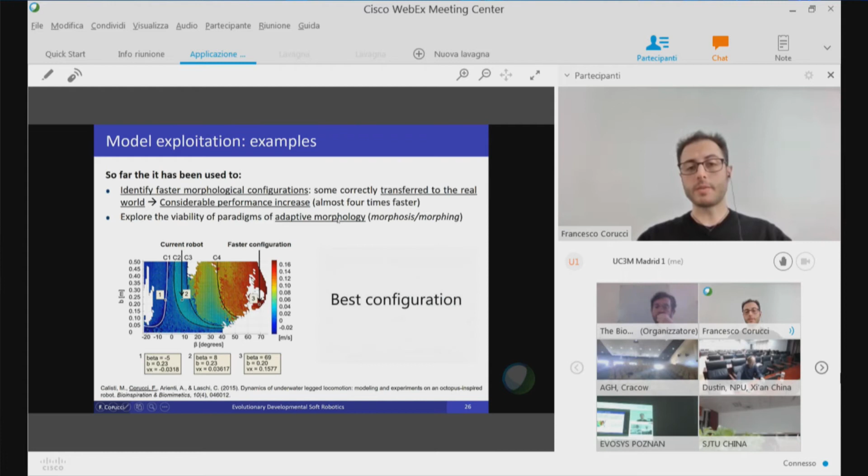And also we used this model in order to explore in simulation the viability of paradigms of adaptive morphology, or morphosis.

The next application, we tried to generalize upon this model, and the goal was to perform a more extensive exploration of the design space of the robot. So what we did was to generalize the model and feed it into a more general evolutionary system.

Particularly, we used a novelty-based evolutionary algorithm in order to explore the design space. That is a genetic algorithm in which, instead of rewarding individuals that perform better, we reward individuals performing differently. This actually favors exploration of the design space, which is what we wanted.

We found some interesting results in terms of embodiment, for example, and particularly we observed that artificial evolution was able to systematically exploit and discover embodiment in the form of carefully tuned dynamic interplays between morphology, control, and environment.

So this was nice. And also we were interested in seeing whether artificial evolution could provide design indication to the human designers. For example, for this robot, the basic morphological arrangement that was featured in the model was designed by humans in order for the robot to crawl on the seabed.

But actually, artificial evolution suggested a very different locomotion modality that turned out to be much more effective. That is, to have these kinds of very fast strokes of the limbs in order to have the so-called sculling-based swimming. So the robot started swimming away from the seabed instead of crawling, which is what we expected.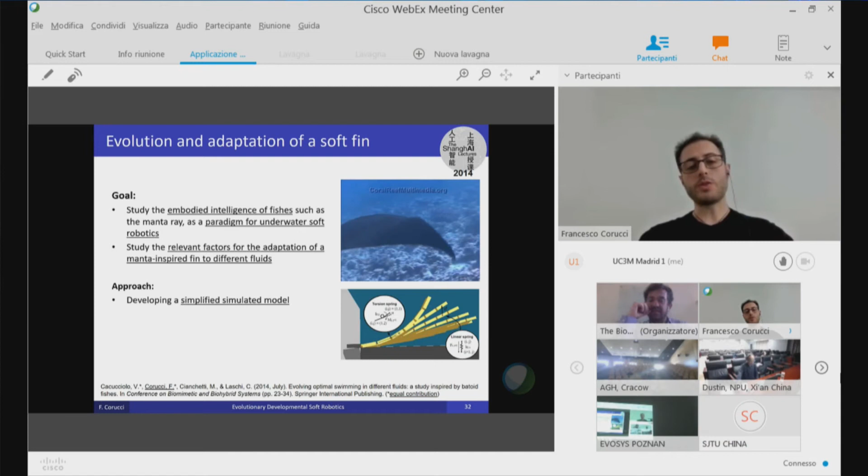So what we did here was to develop a simple simulated model for a compliant manta-inspired fin, and then co-evolve the morphology and the control of this robot in different fluids. The fitness function was based on fluid dynamics metrics associated with swimming efficiency from the biological literature.

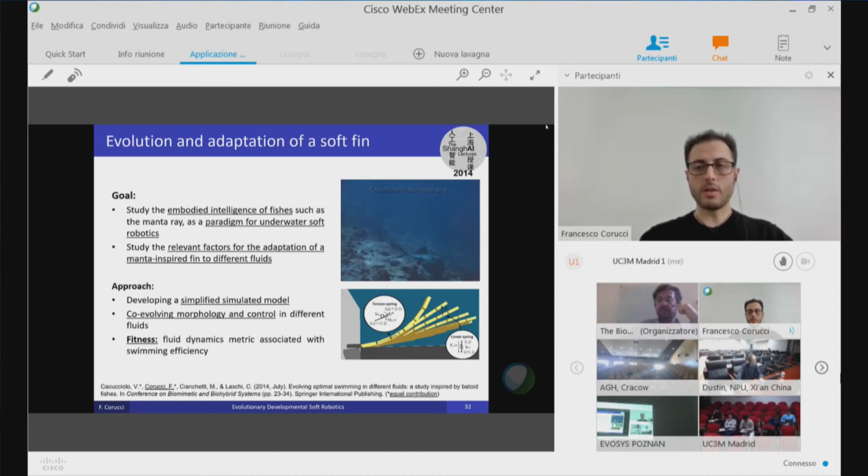Here you see the results of this study: this simulated compliant fin forming in this virtual environment. You can sort of guess that the behavior resembles that of the biological model, and quantitative metrics indicated that the results were consistent with the biological system. We did that for a couple of different environments and understood the most important factors for adapting this kind of morphology to different fluids.

Here we move towards more general evolutionary systems. The first thing we started to do was study the evolution of soft locomotion with these tools. Particularly, we wanted to investigate the free-form evolution of soft locomotion in both aquatic and terrestrial environments. Free-form in the sense that we don't want to work on a model already pre-shaped by humans, but start from a blank workspace, both for morphology and controller, and let evolution figure out how to assemble robots using some material in order to have effective locomotion.

We were also interested in studying the effects of different material properties on the evolved morphologies, behaviors, and energy performance trade-offs. Finally, we wanted to study the effects of environmental transitions from water to land and vice versa on the evolution of locomotion. So questions such as: is there any benefit in evolving swimming locomotion first in order to later evolve walking, and the other way around?

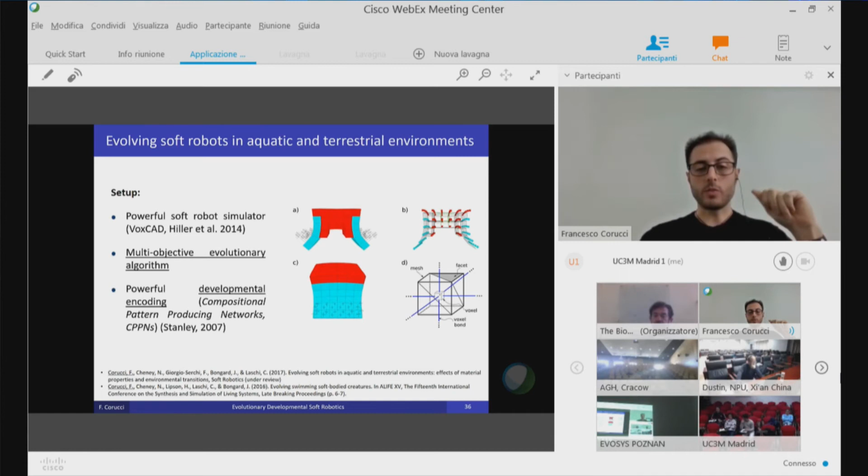This setup was based on a powerful soft robot simulator called VoxCAD, a multi-objective evolutionary algorithm, and a powerful developmental encoding known as CPPN, which Josh touched on in his lecture. In the optimization, we asked to maximize travel distance, minimize the muscles present in the robot—so the energy, if you like—and minimize the employed material.

We did experiments both on land and in water by providing 5 different materials to evolution, characterized by 5 different stiffness values, S1 being the softest and S5 being the stiffest. We also did transition experiments: we start evolution on land, for example, and then halfway through evolution we move the whole population into water, or the other way around.

On land, terrestrial locomotion cannot be evolved if the provided material is too soft, which is intuitive—if you take an octopus and put it on land, it's not able to locomote very well. As we move towards stiffer robots, we observed better performance, lower energy consumption, and an increase in morphological and behavioral complexity. So on land, soft robots are simpler, with simpler morphologies performing simpler locomotion, such as inching and crawling. But with stiffer material, we see more complex morphologies and more coordinated gaits being produced, such as this one.

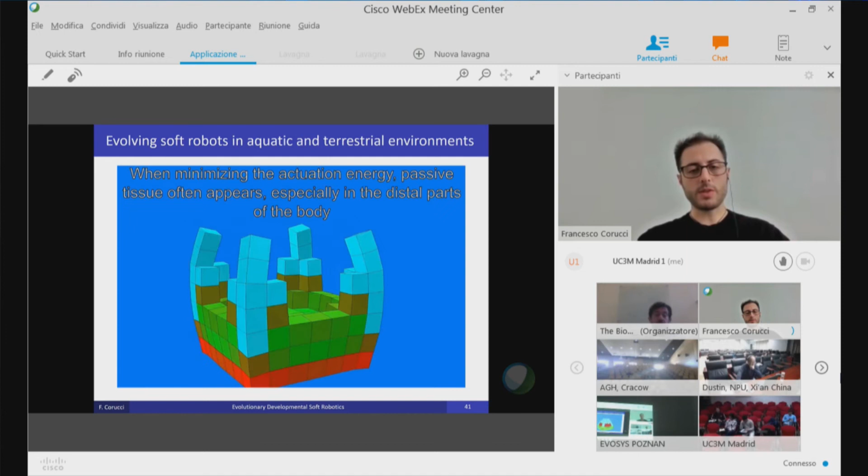We evolved a bunch of different robots, such as this one, which resembles a jellyfish, and others, such as this one, which is not very different from our previous Manta robot.

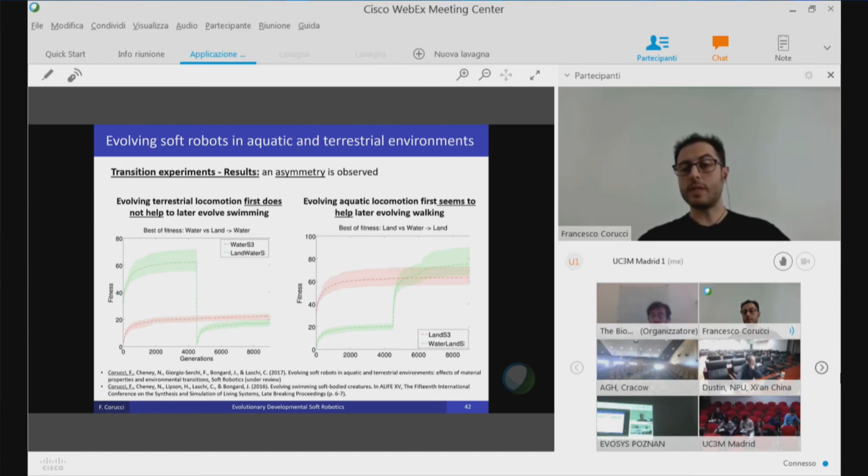Regarding the transition experiments, we observed an asymmetry. Particularly, evolving terrestrial locomotion first didn't help, and was actually harmful to later evolving swimming, whereas evolving aquatic locomotion first seems to help in later evolving terrestrial locomotion.

Doing this kind of analysis, we also observed other interesting exaptation phenomena, as we commented before. For example, when moving from land to water, robots develop flapping appendages for swimming, whereas when moving from water to land, those appendages are usually lost and are adapted and shortened in order to become legs or arms. Here you see some examples of this kind of exaptation.

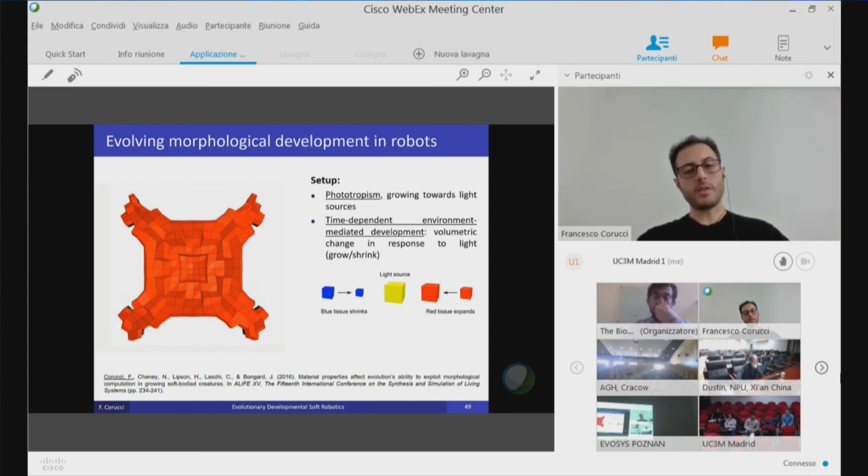So what we did here was to start evolving robots that could grow. The first task that we provided to evolution was phototropism, so growing towards different light sources present in the environment. On top of evolution, we started modeling time-dependent, environment-mediated developmental dynamics. In this case, we talk about volumetric changes of every little piece of material, called a voxel, in response to the sensed light levels. Evolution could decide to employ blue pieces of material that shrink when close to the light source, or red pieces of material that expand when close to a light source. What evolution optimizes is both the morphology and the developmental parameters, so the topology and the developmental properties of every piece of material.

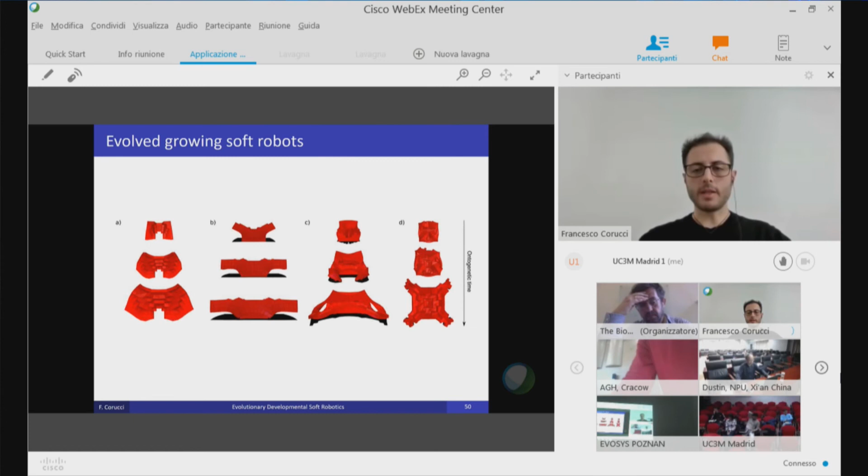Here you see some of the evolved creatures, and developmental time unfolds from top to bottom. You see that all of them try to reach out towards light sources that are not depicted here, and they grow and unfold from an early stage to an adult form in the last stage of the evolution of the development.

At this point, having this setup, we start asking more questions, such as under which conditions does morphological computation evolve in this kind of growing soft-bodied creatures? What we observed is something interesting: material properties influence a lot evolution's ability to find effective morphologies. So when material properties are suitable, evolved creatures exhibited more effective and natural behaviors, better exploited the interaction with the environment, and leveraged passive dynamics in place of active control, which is what we intuitively associate with morphological computation.

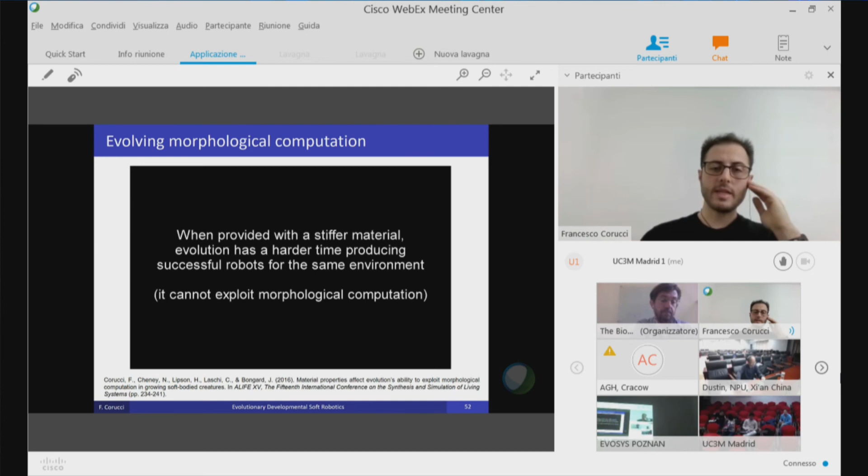But what happens if we provide evolution with a stiffer material that is not very suitable for this specific task environment? Well, what happens is that evolution has a harder time producing an effective robot and comes up with a fully actuated robot like this one that is not actually exploiting the environment, it is fighting the environment, laterally reaching towards the light sources. You see more colors appearing here because the developmental control has to be more complex. We needed some kind of antagonistic action in order to solve the task.

And we also quantified this in information theoretic terms. What we showed is that in this specific task environment, soft robots perform better despite using simpler growth controllers. The complexity of the growth controller was computed in information theoretic terms, using basically Shannon entropy. This is a way of quantifying morphological computation in this specific domain. What we also observed is that when morphological computation could not be evolved, as in the case of stiff robots, evolution automatically tried to compensate for it by complexifying the control, which is something that we might want.

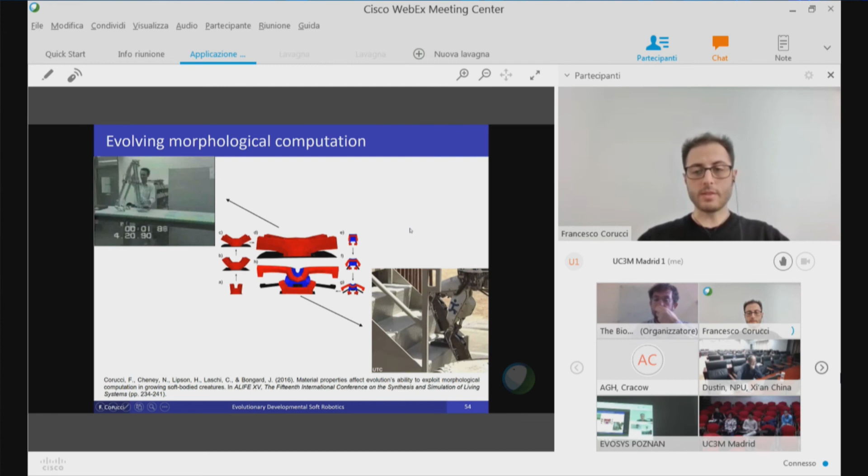So in a sense, the soft robot that was passively unfolding toward the light sources is something that might resemble the passive dynamic walker that we probably saw in the lecture—a robot that, in presence of very simple control, is able to solve a complex task by exploiting morphological computation. Whereas the second type of robot, the stiff one that was fighting against gravity, can resemble a fully actuated robot that doesn't exploit the interaction with the environment so much.

The last question we asked was when, how, and in response to which stimuli should soft-bodied creatures adapt. This is interesting because we know soft robots can adapt, but how should they adapt? If we want to exploit their new abilities, we need to understand that.

We also wanted to understand whether evolving morphological development could result in increased adaptivity and robustness. So again we used a locomotion task, where evolution dictates the stiffness of each piece of material, the initial stiffness, but also whether a voxel should soften or stiffen in response to mechanical stimulation. This is inspired by biology, concepts such as Wolff's law of bone remodeling. So we have material that can alter its properties based on interaction with the environment, and it does so along a developmental time scale.

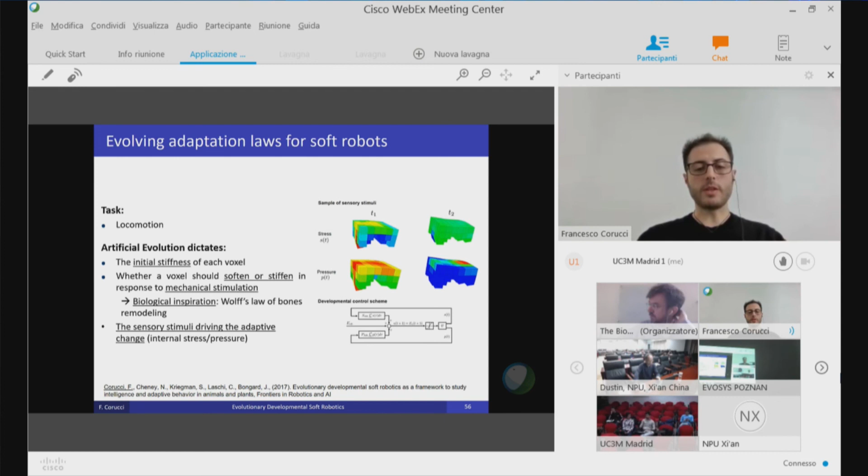Evolution could automatically decide which sensory stimuli should drive this adaptive change, choosing between internal stress in the material and internal pressure. What you see here is one of the best robots we evolved, which has developed a strategy in which it stiffens the parts of the body that are repeatedly stimulated.

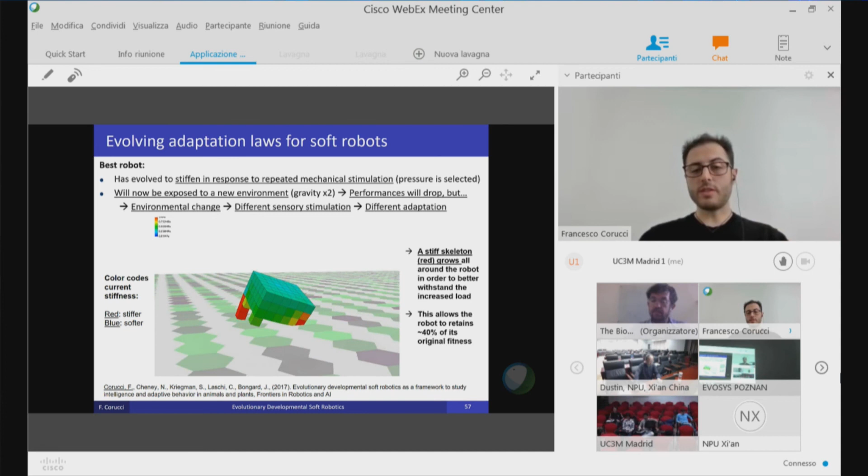You see the red pieces of material becoming red because they interact more with the environment, so they stiffen. At some point we change the environment, particularly with double gravity. The robot is at first stuck because it never saw this environment, but then you see the color change, and this red skeleton grows all around the robot. A change in the environment triggered a different sensory stimulation and a different adaptation. This red skeleton helps a lot with locomotion, so the robot becomes able to better withstand gravity and regain as much as 40% of its original fitness in an environment it never saw.

So it appears that the evolved adaptive law is general enough and could result in increased adaptivity and robustness. Coming to conclusions, what we try to show is that artificial evolutionary and developmental approaches can solve complex engineering problems.

These techniques can also inform soft robotics and help us unleash its full potential, especially in terms of adaptivity. But more than anything, these techniques can help us understand the conditions under which adaptive and intelligent behavior emerges in biological and artificial systems.

Some other remarks from the work we've presented: the notion of evolutionary creativity—the fact that artificial evolution is able to think outside the box and suggest effective and counterintuitive solutions—the fact that it can systematically produce embodiment and morphological computation, and additional remarks on the importance of the body, particularly material properties, which can dramatically affect the emergence of different morphologies and behaviors, as well as morphological computation.